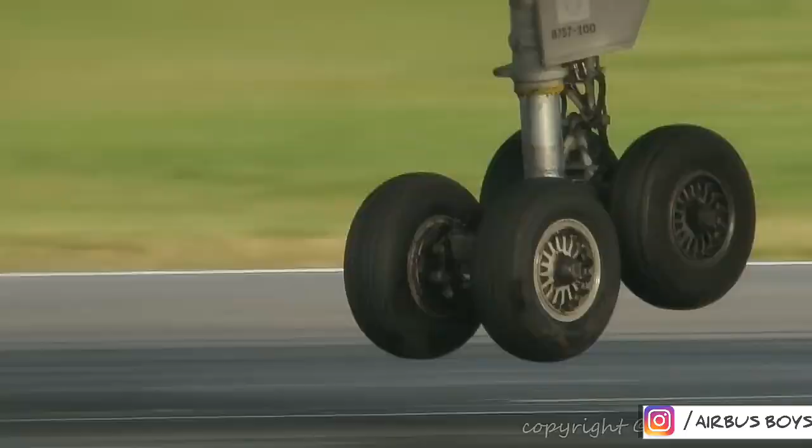In order to clear the idea of heat generation, let's have a look over the Finnair A330 landing. The only two areas where you can see heat expelling out from the aircraft are the aircraft tires and the engines. The tires are subjected to extreme temperatures, or you can say literally they are burning out of hell.

So now let's go into the deep explanation for tire construction. A tire is a layered structure designed to withstand the shock and sudden acceleration of landing, the heat of brake application. The steel wire bead serves as the foundation for attachment of fabric plies and provides firm mounting on tires and wheel.

Starting from the top right side, the buff line cushion is the surface of the tire just below the tire tread to provide more firm mounting and shock absorbable feature.

The second one is tread reinforcing ply. It is used to reinforce the area that comes in direct contact with the runway. The carcass plies run horizontally as well as diagonally in order to reinforce the entire tire rubber structure.

The inner liner acts as a seal in order to prevent the air escape, especially the nitrogen escape from within the tire, since the tires used in aircrafts mostly are tubeless nowadays.

Moving down further, we see the bead heel and the bead toe. These are the areas that come in direct contact with the wheel. They anchor the tire carcass and provide firm mounting surface over the wheels of the aircraft.

Moving further, we see the apex strips that run circumferentially along the entire bead area in order to reinforce the surface of the tire that comes in direct contact with the aircraft wheel.

The wire beads you see are essentially the steel wire beads that serve as the foundation for the attachment of fabric plies as well as to provide a firm mounting surface for the wheel.

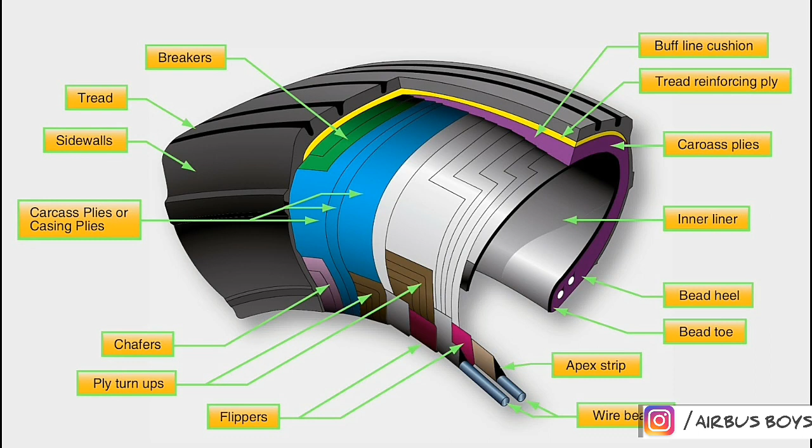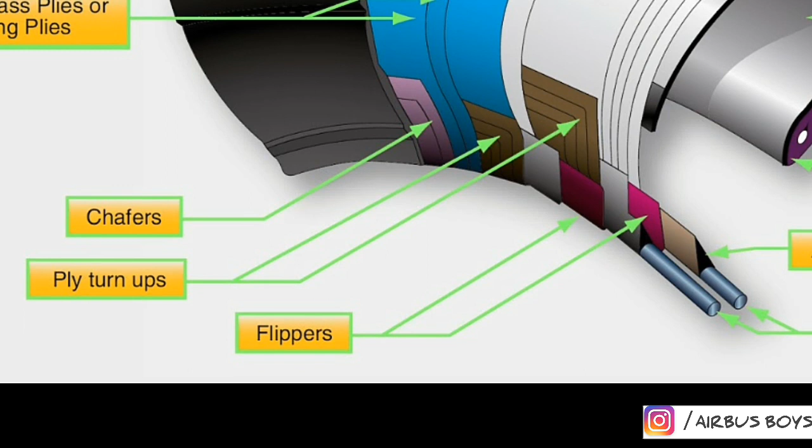So what are the flippers? Flippers are the layers of fabrics and rubbers placed around the bead to insulate the carcass from the bead and improve the tire durability. Chafers are used to protect the carcass plies from damage during rotation of the tire.

Another cross-sectional view of the aircraft tires shows the tread being the most important section of the aircraft tire. The crown part that comes in direct contact with the runway is known as the tread area. The tread area is installed with a number of grooves running circumferentially around it through the aircraft in the direction of rotation.

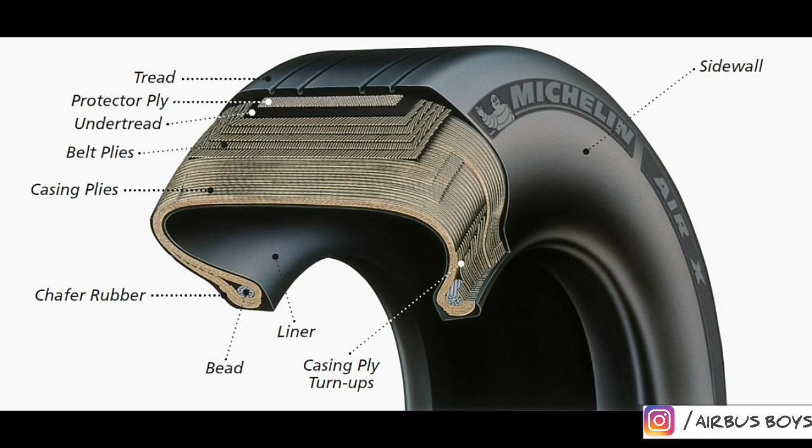On to the right hand side is the sidewall of the aircraft tire, where important information related to manufacturer as well as the size of the tire is given.

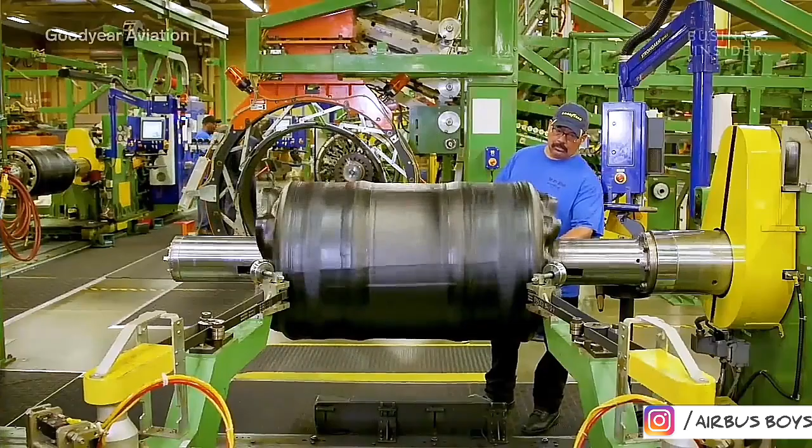Goodyear, a reputed aircraft tire manufacturer company, states that a perfectly manufactured tire lasts up to 250 to around 450 landings depending on the intensity of the operation of the tire.

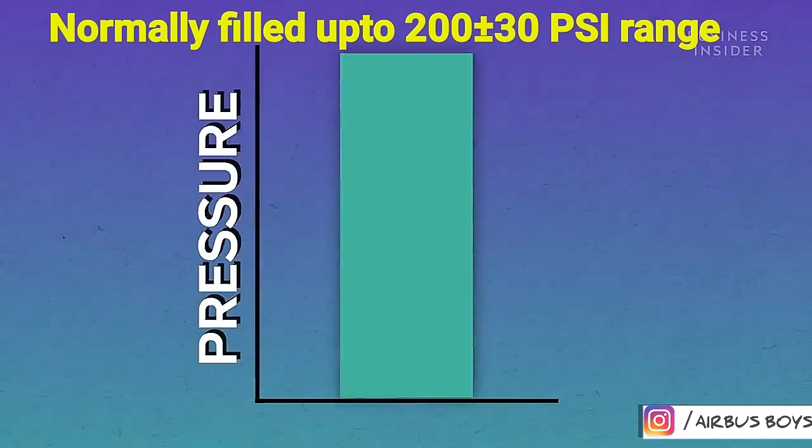The tires are normally inflated twice the truck tire and 6 times the automobile car tire. The higher the pressure of the tire, the more firm the tire will be, hence more load it can take off the aircraft. The tires are not inflated with regular air containing oxygen but with nitrogen.

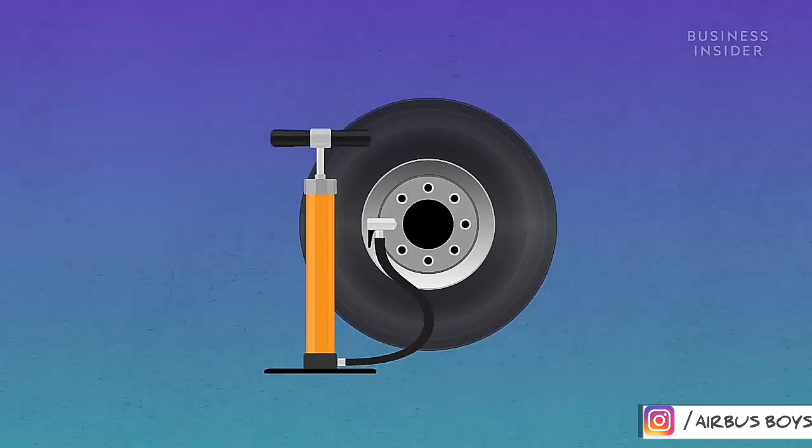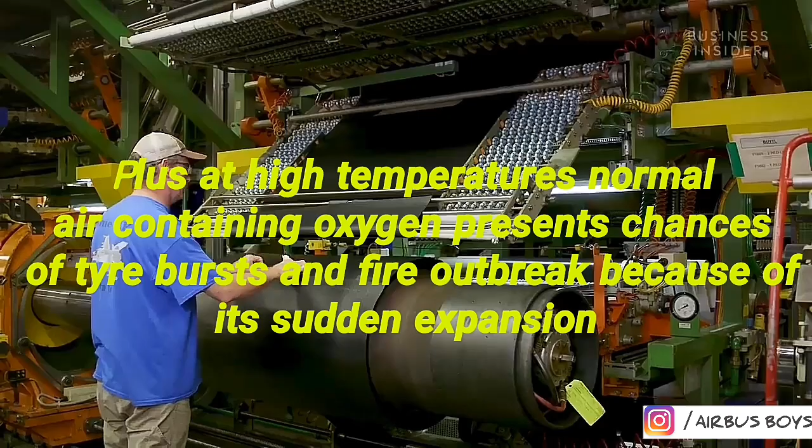Nitrogen, being the inert gas on the periodic table, is less subjected to temperature as well as pressure changes within the aircraft tires. The aircraft tires are subjected to extreme conditions, and the tires beyond service are retreaded again to be brought into service.

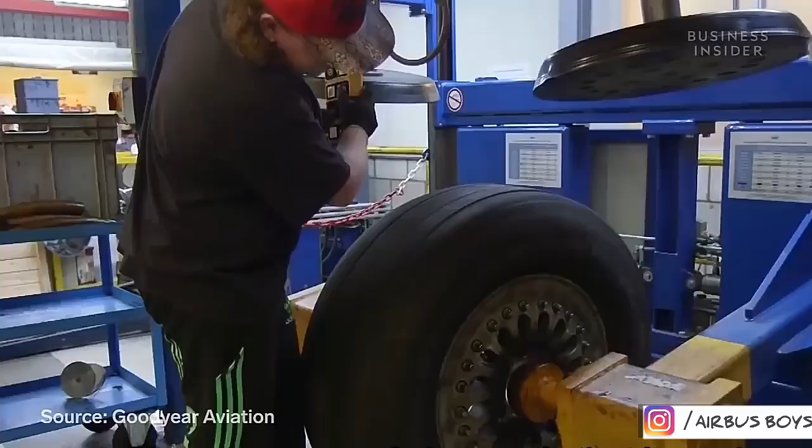The tires also have a special pattern instead of having a blocky pattern as you see in the automobile tire. So the aircraft tires are installed with grooves that run circumferentially along the entire rib of the aircraft.

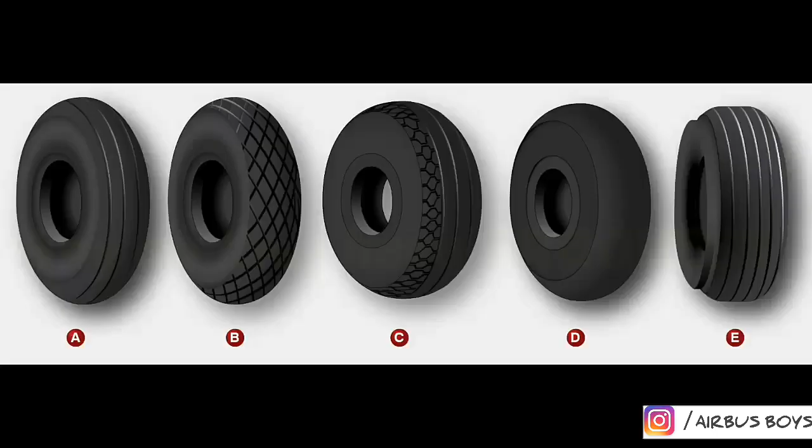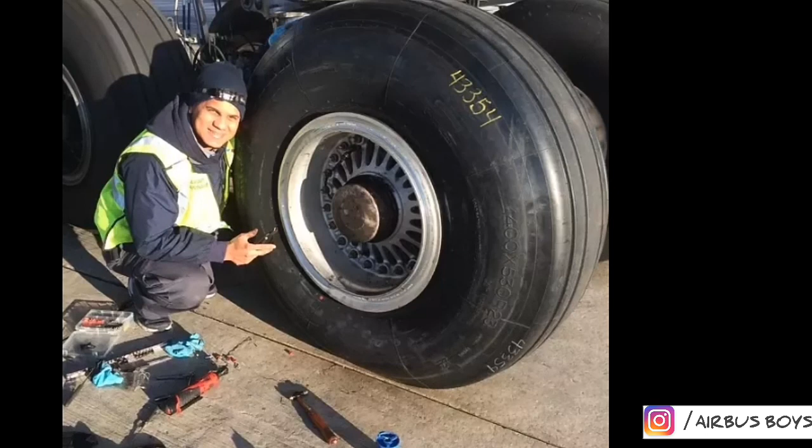Having a look at the grooves of the tires shown on the screen, you will observe that all these 5 tires have different types of groove, but the grooves that are presented in tire number A are the most widely used one. Today most tread designs have continuous groove pattern with 3 to 6 ribs running circumferentially.

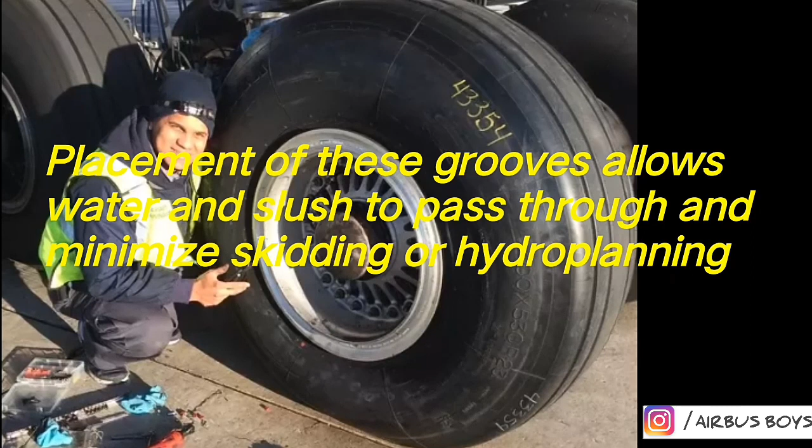The placement of these grooves allows the water and slush to pass through them, thereby minimizing skidding or hydroplaning on wet surfaces and also providing a cooling media to the aircraft tires.

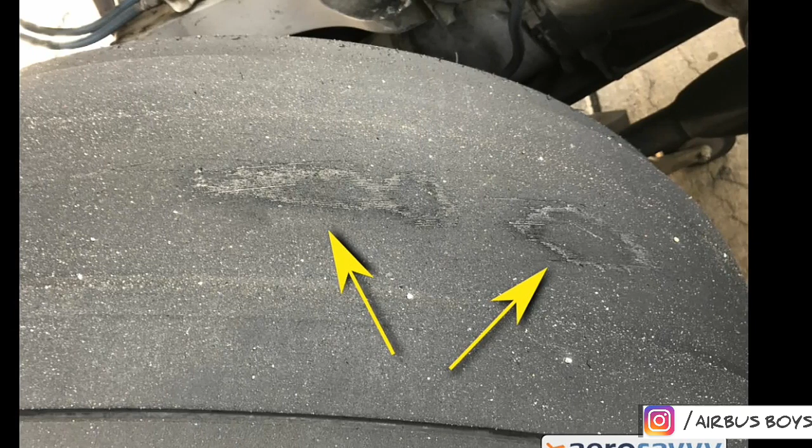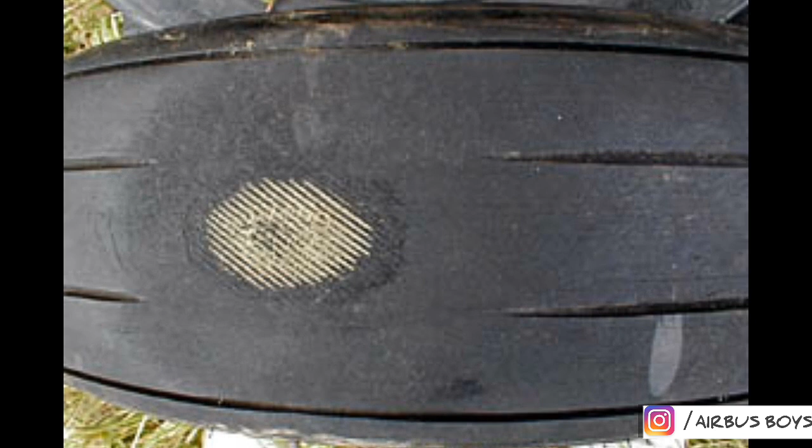So talking about the replacement cycles of the aircraft tires, they are normally replaced before their life if they are in such conditions because of extreme runway causes, sometimes due to forceful application of brakes or wheel getting into an extreme skid or getting into an extreme heat condition like this one.

They are normally replaced before completing their life cycle. So why do these damages occur? They occur because of forceful application of brakes, extreme skid, hard landings and improperly balanced tire and wheel. The fourth reason here would be the topic of our next video in part 2.